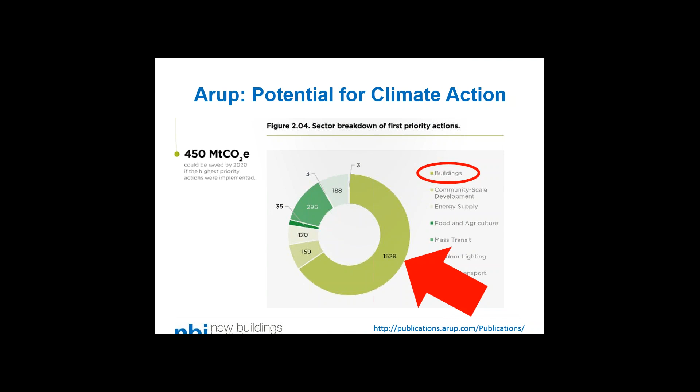And I think at the same time, it's worth pointing out Arup and C40 Cities released this study called Potential for Climate Action, and in that study, they pointed out that in terms of first priority actions for reducing carbon emissions, buildings play heavily. In fact, buildings provide the best strategy for first priority actions for greenhouse gas emission reductions. And so we would like to focus our efforts around zero net energy buildings and really tackling this first priority action through the building sector.

For the past several years, NBI has been tracking zero net energy buildings nationally, and with our current database, we've tracked the ZNE building activities that are happening across the nation, 40 different states in the U.S. You can see also provinces in Canada, and every climate zone in the U.S. represented. And our data is showing a great growth in the number of buildings that are either verified or emerging as zero net energy buildings. Please keep in mind that these are the ones that we're aware of, but if you're aware of projects that may not be in our database, we ask that you enter them into our registry and database.

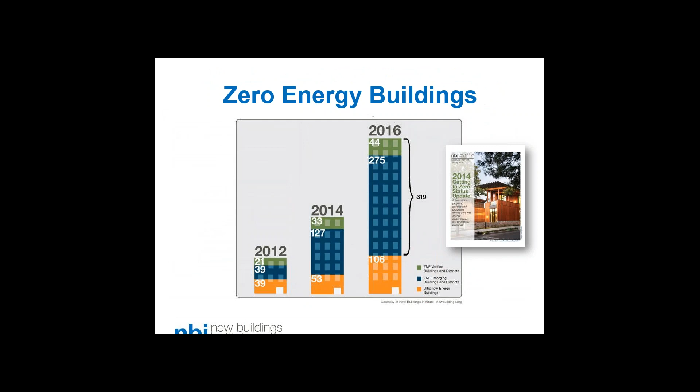Recently, we released a study that we did for the Continental Automated Buildings Association on zero net energy buildings and the controls in those buildings. This was a survey of 23 buildings that are either ultra low energy or zero net energy, to understand the way controls are working and if they're effective and what some of the challenges and opportunities are. I think one of the key findings in there that I wanted to share is this idea of setting the target for zero net energy, which is actually a big part of what our panel will be discussing today: targeting zero net energy and what strategies you can use to get there.

And I think the statistics here are really pretty important to see. That of all of the survey respondents, 100% thought setting the target for zero net energy early was very important or critical to success. So 71% saying it's critical to success. So you can see here, none of the respondents said it's not important or somewhat important or even important. It is critical or very important.

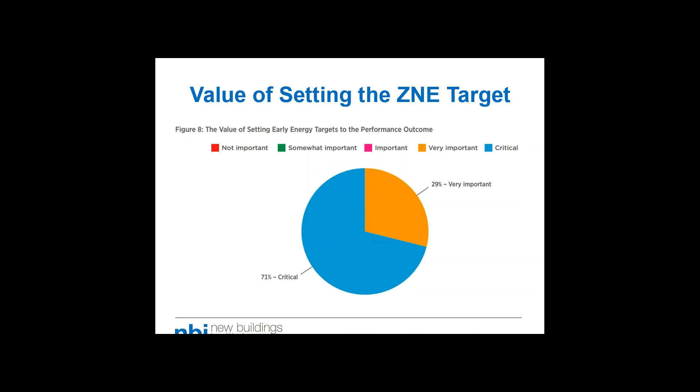In terms of our results from our survey, we find that modeled energy use intensity and metered or actual energy use intensity can vary, and also the ultimate outcome of net energy use intensity in these facilities can vary. But again, the target for ZNE was one of the critical factors in achieving success.

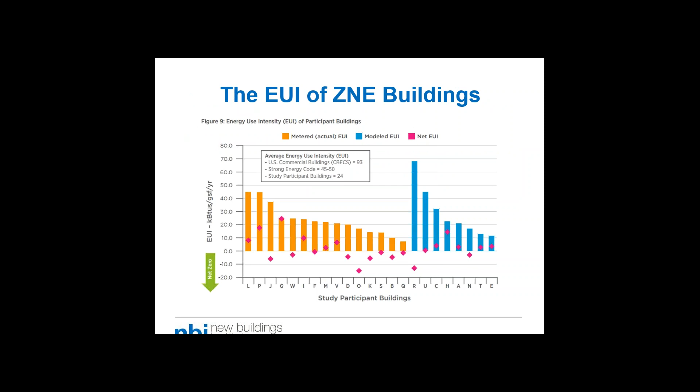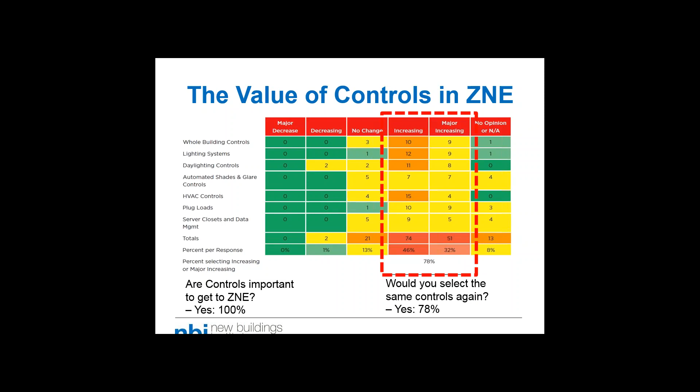We also found that controls are a key driver of achieving ZNE, and the question was basically asked, are controls important? Absolutely. And would you select the same controls again? The majority say yes, but there are lots of qualifications in that response. And we also know from our research that designing to the ZNE target and designing for performance and a focus on operations and occupancy is really important. So we're driving a lot of activity around that.

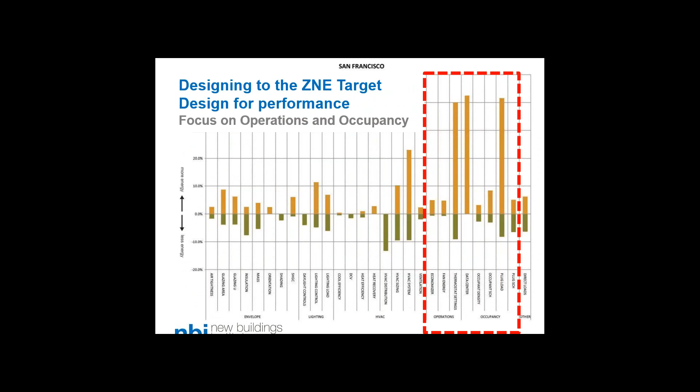And the other thing we recognize is that it's really important to integrate the people that will be operating the facility into the design process and the design team into the operating process. So we want to bring that facilities team into the design process and make sure that there's continuity with the design team through operations to close the gap that typically exists in conventional building development.

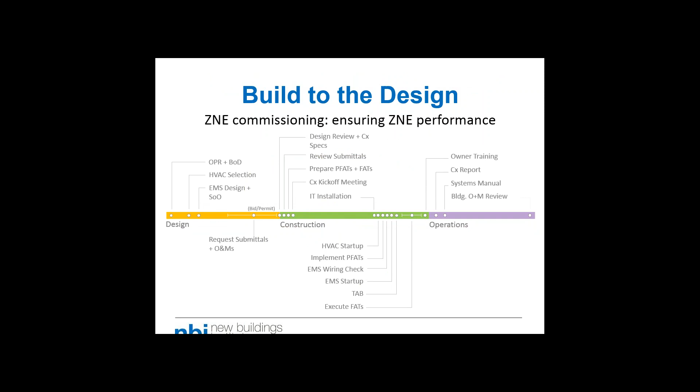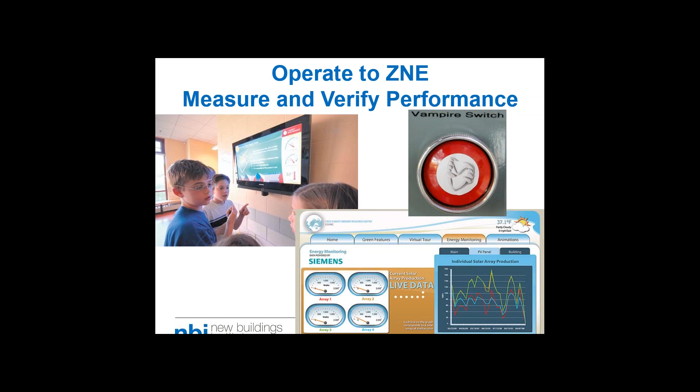And commissioning is key, and perhaps even redefining commissioning for zero net energy performance is something that could be considered as we move forward with ZNE buildings. And then, of course, basically operating to that zero net energy target and measuring and verifying performance is key, and engaging the occupants and the facilities team as well.

So just in summary, we are advocating for setting that zero net energy target early, designing to that target, building to that design, and operating to the target, and then measure and verify performance as you go, and knowing that zero net energy is not a destination but really an ongoing journey.

So with that, I would like to move to our next speaker on the panel, Charles Eley. Charles is an architect and mechanical engineer with more than 35 years experience in energy efficient and sustainable design. He's made a significant contribution to the California energy standards, ASHRAE 90.1, and energy codes in Hong Kong, Hawaii, Guam, American Samoa, and Australia. In addition to his energy code and policy work, Mr. Eley has developed a number of important publications, including the Advanced Lighting Guidelines, Lighting Fundamentals Handbook, as well as numerous other technical manuals on energy efficiency and code compliance. So with that, Charles, please take it away.

Okay, thank you very much, Ralph, for that nice introduction. Next slide. What I'm going to do today is just present sort of a high-level feasibility analysis for ZNE in the United States. Next. Next, and hit it again, Ralph.

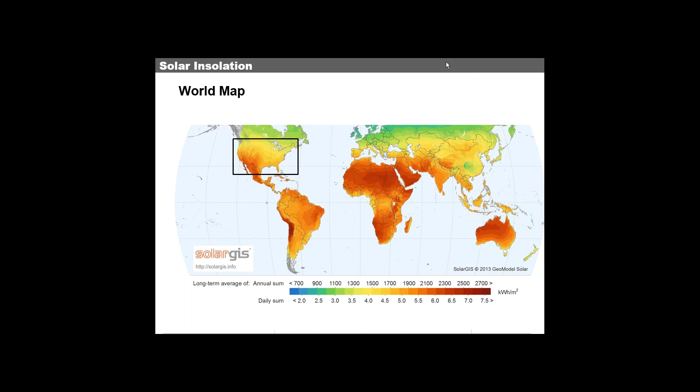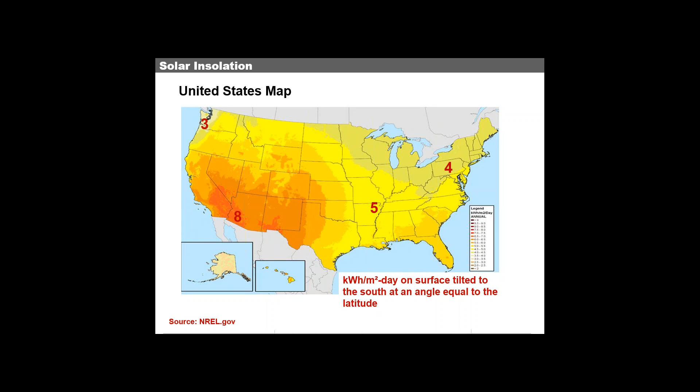So this is a map of solar insolation in the United States. Next. And what this shows is kilowatt hours per square meter per day on a surface that's tilted to the south at an angle equal to the latitude. So the Southwest has the greatest solar, the Pacific Northwest has maybe the least. Most of the country has 5 kilowatt hours per square meter a day or more. Next slide, Ralph.

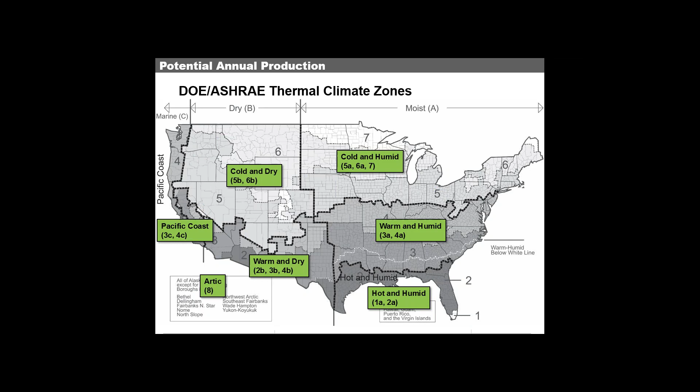So what I've done in this presentation is I've divided the DOE and ASHRAE thermal climate zones into 7 regions, which are identified here, and I'm gonna give kind of a very brief analysis of the feasibility of ZNE in each of these climate regions. Next slide. Next. Yeah, okay, there they come.

continuing to improve. And we've seen dramatic price declines in solar energy in the last 10 years, especially 5 years. Average costs are now in the range of $2 to $3 a watt. Next slide.

So what I did here is for each of these climate regions that I identified, I calculated the kilowatt hours per kilowatt at the optimum tilt. That's the first column. The second column, I calculated the kilowatt hours per year per kilowatt of capacity in a horizontal orientation. And then in the last 2 columns, I converted it to square feet of collector area. And this is based on about 65 square feet per kilowatt of collector area, which is an average for modern monocrystalline panels. Next slide, or next click.

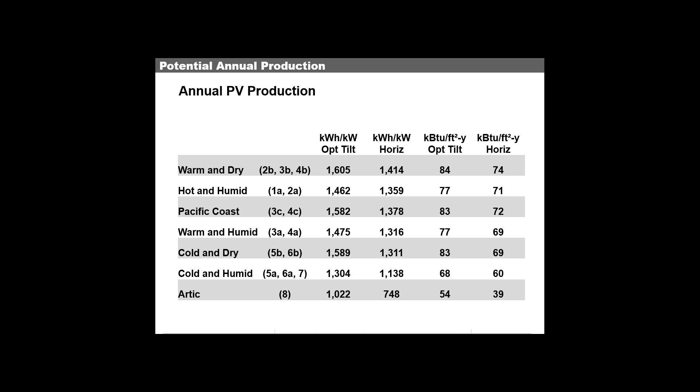So the thing is, if you want to create maximum production on your site, it's actually better to orient the panels in a horizontal position, or to slope them slightly towards the south, but in one plane, so they don't shade each other. An example of a building that did this recently is the Bullitt Center in Seattle. And for a given area, you can actually receive maximum production that way. You may have to buy a few more panels because the production is a little lower, as you can see in the first 2 columns for horizontal versus the optimum tilt. Next slide, Ralph.

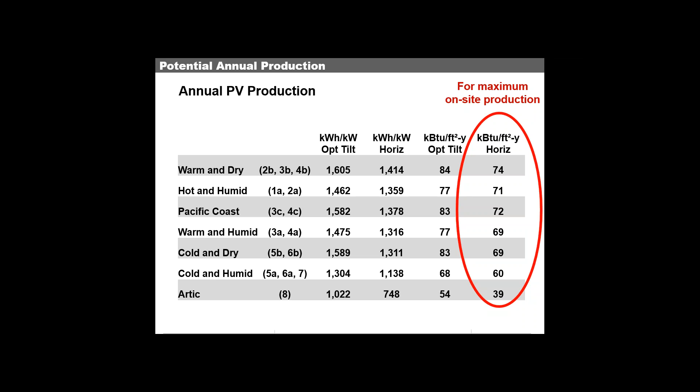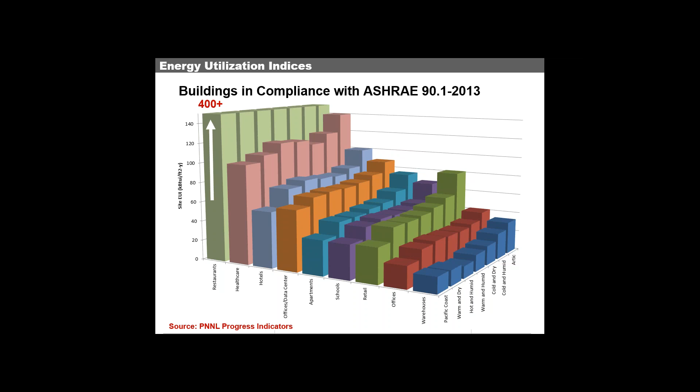The orange line are offices that have a data center in them. Then there's hotels, healthcare, and finally restaurants. The restaurants actually blow off the top of the scale up to close to 400 EUI. So these are typical EUIs for buildings that comply with ASHRAE Standard 90.1 2013, which is the latest published version of 90.1. Next slide, Ralph.

So what I'm showing here is the maximum technical potential. And this is from a study that Jason Glazer recently finished for ASHRAE. And it's based on modeling. He looked at all of the technologies that are feasible and reasonable for buildings and applied them, including some plug load issues and things like that. And you'll notice that these EUIs are significantly lower; in fact, they're on average about 50% lower than minimum compliance with 90.1 2013. Next slide.

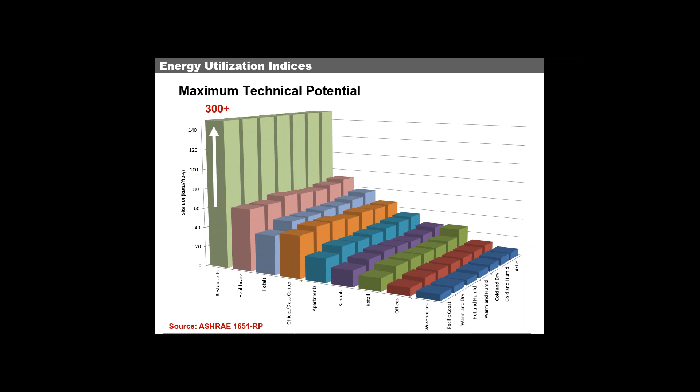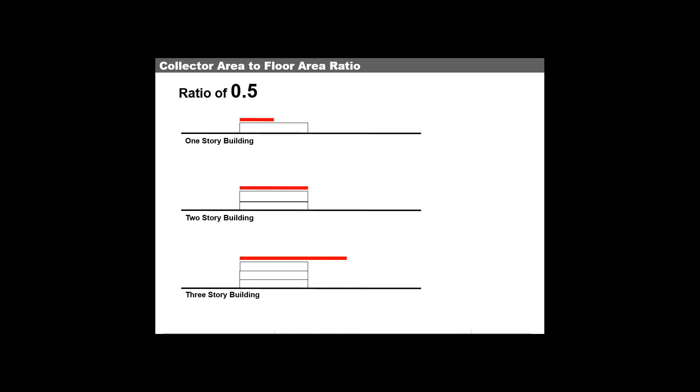So what I'm going to introduce here is the concept of collector area to floor area ratio, and show what that number is for these various situations. So if that ratio is 0.33, then you would need to cover 1/3 of the roof of a one-story building, 2/3 the roof of a two-story building, and you need to completely cover the roof of a three-story building. Next slide. If the ratio is 0.5, then you're beginning to look at problems with three-story buildings. You could get there by covering the roof of a two-story building. Next slide. And then if the ratio of collector area to floor area is 1 or more, then you're going to have some real problems in achieving ZNE for all but one-story buildings. Next slide.

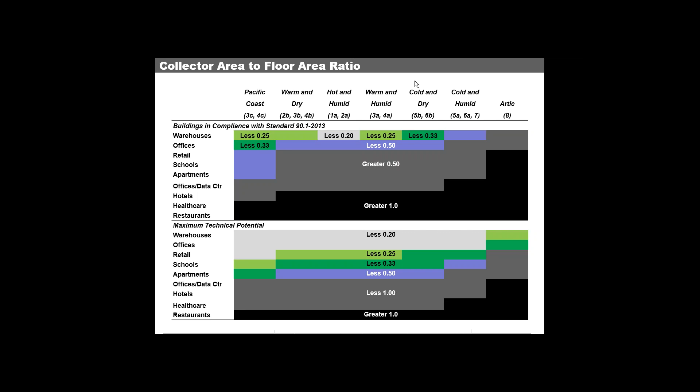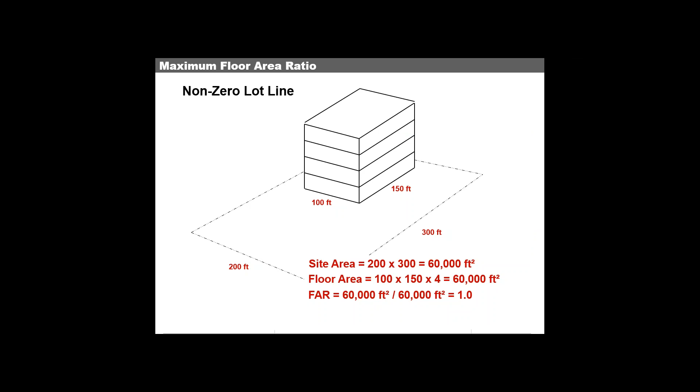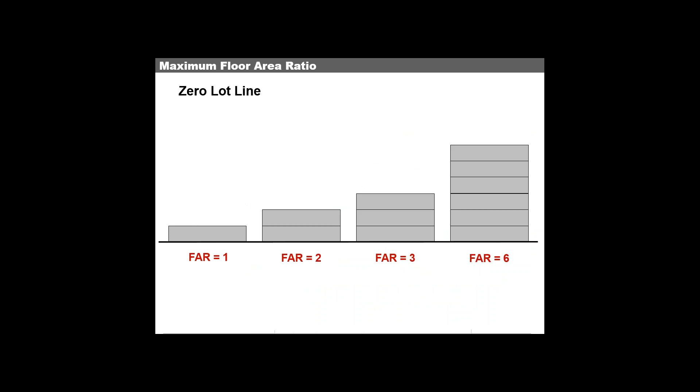So another way to look at this is the maximum floor area ratio. The floor area ratio is a planning concept where you divide the building area by the site area. So in this case, the floor area ratio is 1. Next slide. And if you have a zero lot line configuration, the floor area ratio is basically the number of floors that you have. Next slide.

So presenting the data in a slightly different format, you can see the maximum floor area ratio that you could have in order to achieve on-site ZNE. Looking again at the bottom part of this graph, restaurants are the main problem. Healthcare is also an issue in the cold and humid climate, and several building types are a problem in the Arctic. Fortunately, there's not a lot of construction in the Arctic.

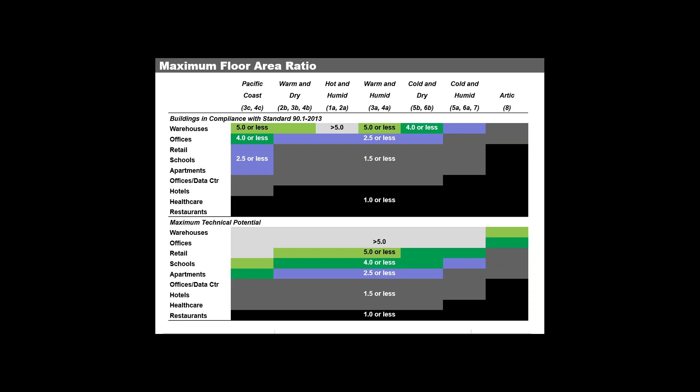And the interesting thing is that if you look at the construction area or the volume of construction activity for different climate zones and building types, the vast majority of those building types and climates are in areas where ZNE can be achieved relatively easily. Next slide, Ralph. Next slide.

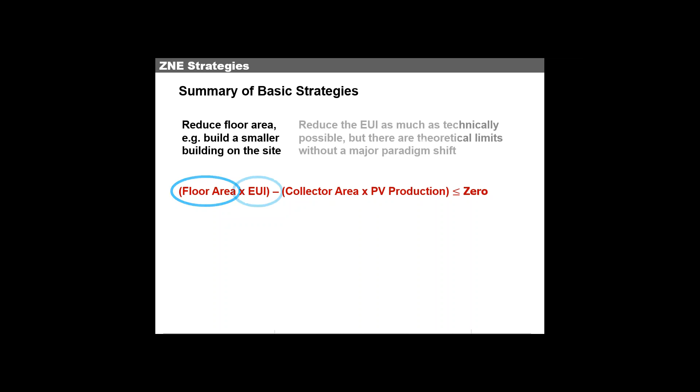So just to summarize, this is sort of the equation for ZNE. You multiply your floor area times the EUI, and you subtract the collector area times the PV production. So the first strategy would be to reduce the floor area if you can. The second option would be to design to as low an EUI as is technically possible.

There's theoretical limits to that unless we have a major paradigm shift like eliminating burgers and fries from fast food restaurants. But the next option is to increase the collector area, but this is limited by the area of the site. And the final option is to just increase PV and inverter efficiencies, but there's also theoretical limits there.

Next slide, Ralph. So there are some off-site strategies. One strategy is to combine the challenged property with other properties through virtual meters or some other technique. Next slide. Another option is to install renewable energy on a remote site. Stanford University is a good example of this. They're putting in a 73 megawatt solar farm in the desert that's going to offset about half of the electricity use on the campus. Next slide.

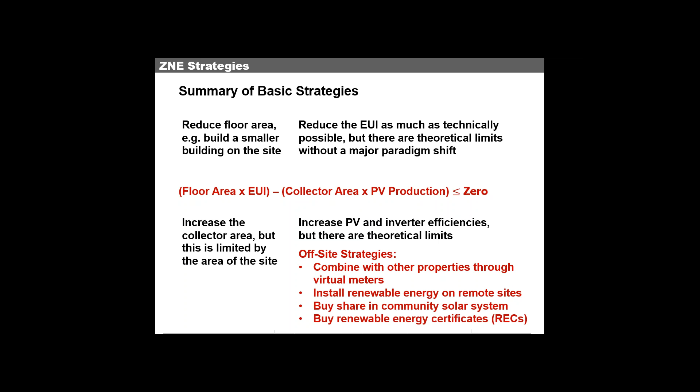In many areas, community solar systems are beginning to emerge, and one option would be to buy a share or to lease collectors in this community solar system. Next. And then the final option would be to purchase renewable energy certificates, or RECs. And in my opinion, this is the order that you should pursue for off-site options. So this is the next slide.

So that's the end of my presentation. This is kind of a top-level feasibility assessment for ZNE buildings. I think the bottom line is that it's totally feasible for all, except for restaurants, which are going to be a problem, and in some areas, healthcare and hotels are going to be a challenge, but it should be possible. And the second thing is that when it's not possible to do it on site, there are some reasonable options for achieving off-site ZNE as well.

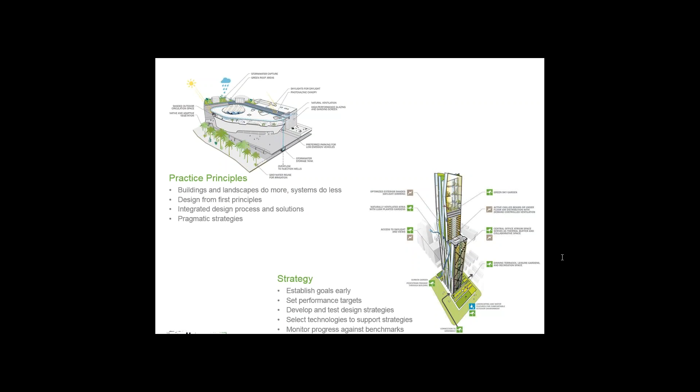Next. And so I'm going to talk a little bit about how we've successfully applied this process for net zero energy buildings through a series of three case studies that are really going to hit three different topics. One, the importance of starting early, as Ralph started us off by sharing. Having a vision for the long term.

And this is really something that we don't see very much of from our clients, and it's something that we've been educating them about, and it's really the idea that a building doesn't have to be net zero energy on day one. You can plan for it to be net zero energy over the life of the building or at some future date, but it's important to plan for that now and then implement it over the long term. And then finally, the importance of not forgetting the small stuff when you're designing a net zero energy building.

Another important thing that we have to educate our clients on is that every single thing that uses electricity or energy in your building has to be accounted for. Next.

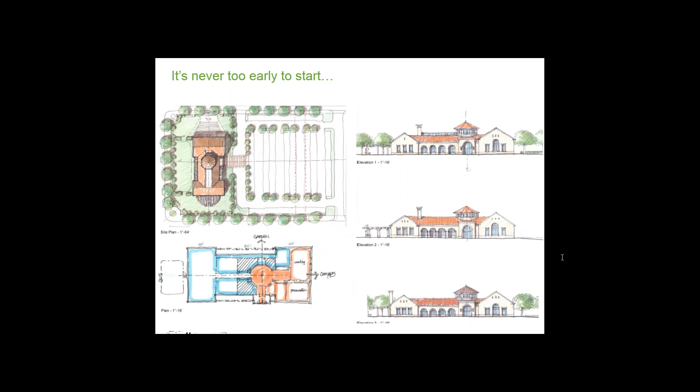So the first case study I have is a project I worked on about 8 years ago. It's a college admissions building in Texas that was being designed by Cannon Design. Next. And this project really illustrated that you can never start too early. I was asked to participate in this project, and basically this is what I was given. I was given a watercolor drawing of the vision of what the architect wanted to design for the building, and that's about it. Next.

And from that, we built a fairly robust prototype model based on the program areas that they discussed with the client, and we created an energy budget. And from that energy budget, we were able to refine it to the point where we were able to show that, with a set of assumptions, we could achieve net zero energy for the project. Next.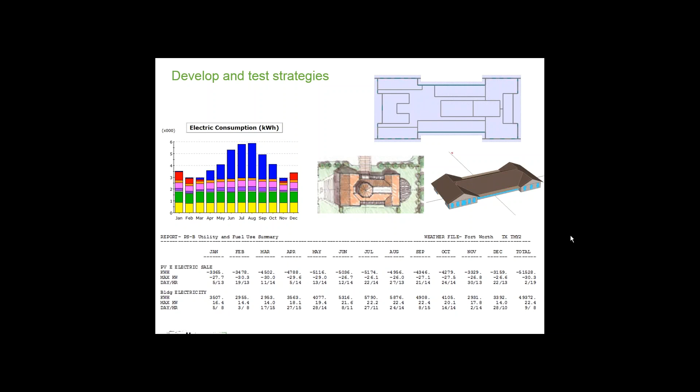And what that allowed us to do is really in pre-schematic design, we were able to set some very aggressive performance targets that the project team would have to achieve in order to get this building on a path to be able to meet net zero at the end of design. And I think the highlights would be that instead of talking about plug load energy and lighting energy, which we typically describe as a density, a watts per square foot number, in this case, it's important to talk about these types of energy uses as consumption targets. So how many kilowatt hours a year per square foot are you allowed to consume?

And this changes the conversation a little bit, because now, taking lighting for example, it's about not only designing the light fixtures themselves to use less energy, but it's also about the controls that are controlling that lighting and how it delivers an integrated system that's going to minimize energy use throughout the entire year. Next.

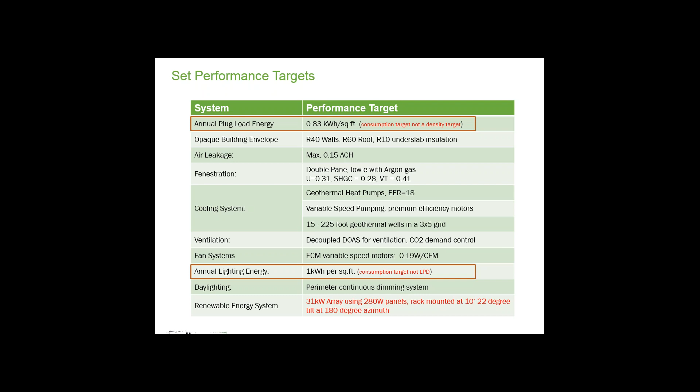Okay. My second case study is a little more recent. This is a GSA federal building that was designed by Crook and Sexton. And the interesting story about this project was, as I mentioned, having this vision for the long term. Next.

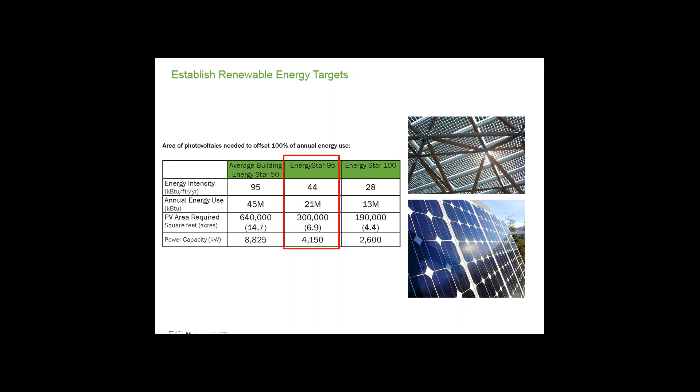And the project chose to target an ENERGY STAR 95 score. So it didn't target the most aggressive building energy performance that it could. And really this was striking a balance between first cost and performance and the magnitude of the renewable energy systems that would be required to hit net zero energy. And so that's why it's important to sort of bookend, and then you can do this optimization analysis to find the right target. Next. And then with that target, the team was able to go and design a building that met that performance. Next.

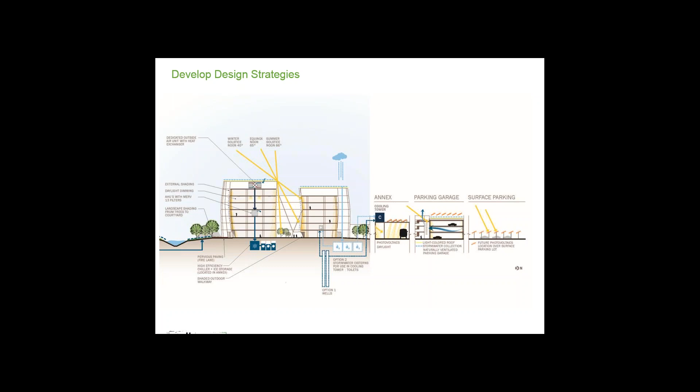But really the most interesting aspect of this project wasn't that it was designed to be net zero energy. It was that it's designed to be net zero energy at some time in the future. The project couldn't afford to be net zero energy on day one. And so on day one, the building was designed to only have about 17% of the PV it needed. It had about 30% of the solar hot water that it needed to get to net zero energy.

But there was a plan that was created to allow the building to expand the renewable energy on the site to achieve the net zero energy goal over a 10-year period. And as you can see, it was a phased approach that adds PV to additional roof and parking, and then continually adds PV until at the end of 10 years they would be achieving net zero energy.

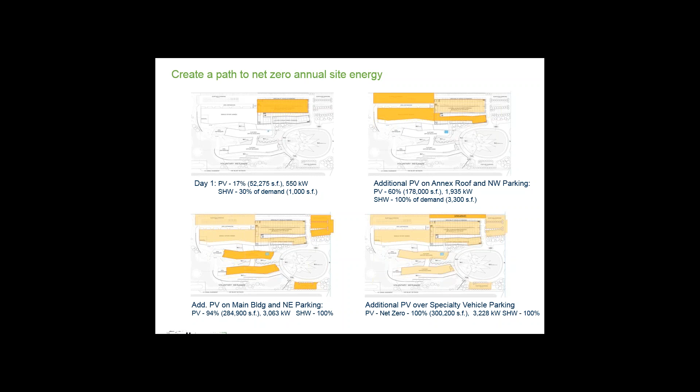Too often we come up against clients that think about it as an all or none. You know, oh, I have to do net zero energy all in or not at all. And my message would be, it doesn't have to be. Phase it in over a period of time and at least design the building and the site so that you can achieve net zero energy in the future. Next.

And then finally, my third case study is a project, Frick Park Environmental Center in Pittsburgh, that was designed by Bohlin Cywinski Jackson. And this is really about not forgetting the small stuff. Next. And so Frick Park is pursuing Living Building Challenge. For those of you that don't know, Living Building Challenge certification is sort of like LEED on steroids. And one of the things that you're required to do is to be a net zero energy building.

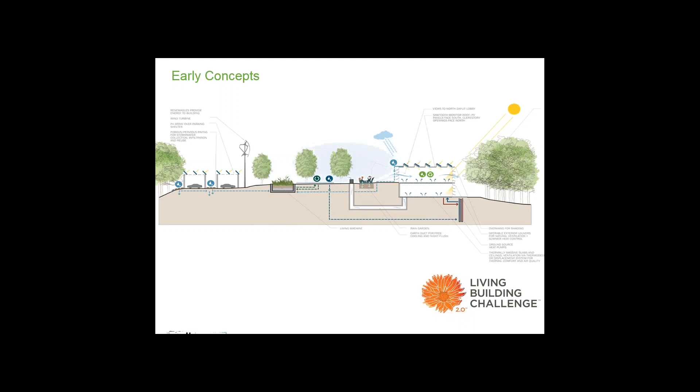And so the project started with early design concepts. Next. Then it moved into the more detailed design phase. And really what happened at this point is the client started to introduce all the other things that they needed for the site. They have gatehouses that are the entrance to this park site. They had a barn and service yard. They wanted to incorporate a fountain as part of the landscaping design. And all these things needed to be incorporated into the accounting of net zero energy as part of the Living Building Challenge certification. Next.

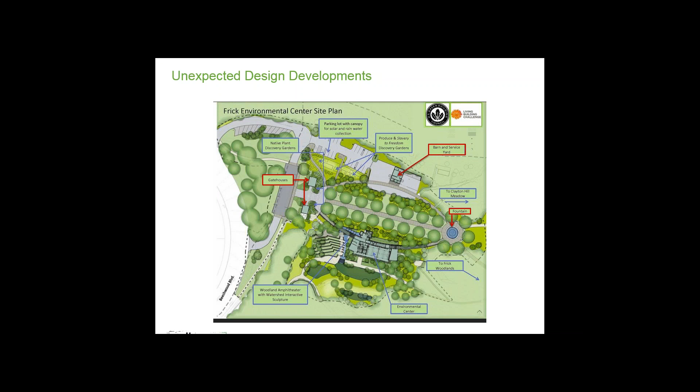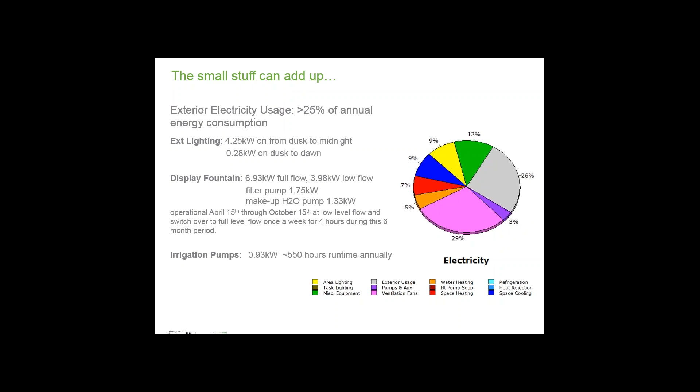And as you can see for this particular site, the exterior energy use was about 25% of the total annual energy use. And if it had been forgotten, the project wouldn't have been able to achieve the Living Building Challenge. And so it's really critical that you carefully account for all of the different pieces of equipment that are on the site, even things you don't typically associate with the building, like outbuildings or landscape features that are going to use energy as well. Next.

And so I would say, again, from that process standpoint, it's never too early to start. It's critical that you design energy metrics for both the design and the operation of the building. Don't be constrained by designing for day one. If your budget can't afford it, plan for the future. Plan to achieve net zero energy at some point 5, 10, 15 years after the building opens.

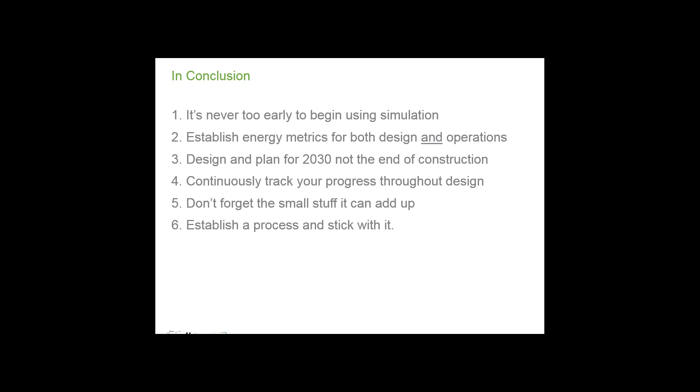You have to continuously track your progress throughout design to make sure that you're on task and that changes haven't popped up that impact your budget. Don't forget the small stuff, and you have to establish a process and stick with it. Those are really the drivers for successful net zero energy buildings. Next.

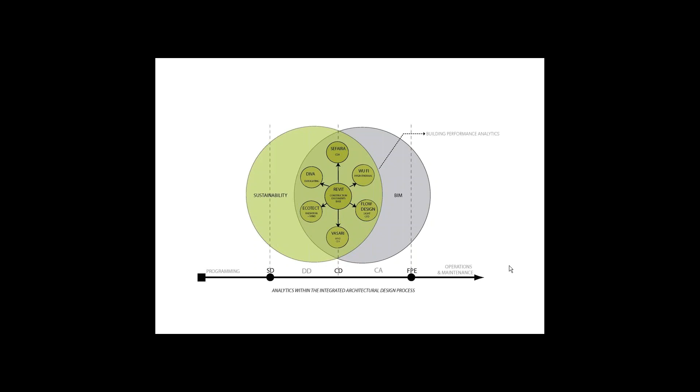And teaching our young architects to embody this idea starts from the BIM sustainability wheel, which explains how building performance analytics is integral to driving the design process all the way to the operations and maintenance phase, similar to what Mike had alluded to. We're teaching students not to stop at the occupancy, but to continue, and we're teaching them tools that can go from the onset of design into facility information modeling using BIM tools.

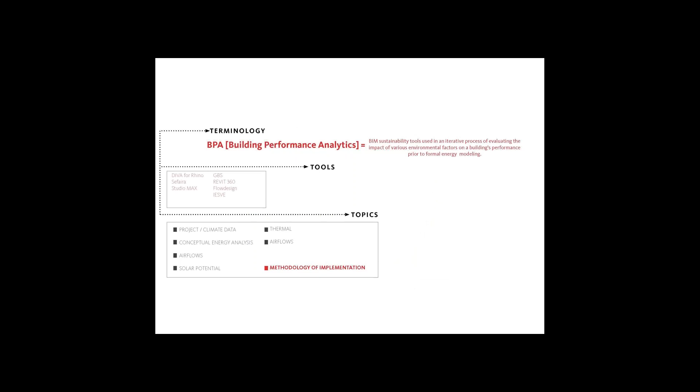So with respect to building performance analytics, we can define BPA basically as a series of tools used by architects in the process of evaluating performance prior to energy modeling. The tools are associated with topics of environmental conditions which require understanding. And as you can see, there are many different topics.

Various software can attain certain performance analyses, and environmental factors are applied to passive strategies, but namely those that impact energy. There are 4 main categories that I've identified with respect to optimizing passive strategies prior to mechanical intervention in sustainable design and net zero design. These are solar potential, which is daylighting, solar radiation, shading, electric lighting. Climate, CEA, conceptual energy analysis, airflows, whole building simulation, and thermal qualities.

Through the past few years of teaching building performance analytics as a new course, I've recognized certain patterns in how students are using these tools to create their designs, the studio projects and projects within the building performance analytics class. I've collected these methodologies and deemed them methodologies of BPA integration.

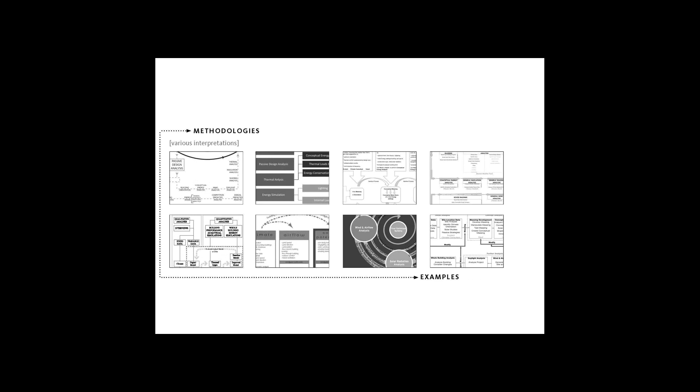Through studying many of these, both in the classroom and outside, prior to my entry into full-time academia when I was practicing, I recognized that certain factors need to be grouped together to maximize ease and fluency in maximizing potential optimization of some of these early sustainability objectives.

Solar potential is one of the most important, and it spans 4 different categories: shading, solar incident radiation, daylighting, electric lighting. Project climate data is more of the static element that really can't be changed so much when you're doing performance analytics. Conceptual energy analysis, CEA, is one that studies EUI at the onset of a project very preliminarily and then starts to increase the specificity as the model is informed with context, with materials. Thermal and airflows also are in tandem with the conceptual energy analysis studies.

The various interpretations of how these tools should integrate into the design process have been explored and are continuing to be explored, but a few conclusions can be documented as static and dynamic iterations of integrating tools to define an iterative analysis. This is the climate tool. Climate Consultant is the nominal and the most outlasting tool that's been used to study climate, radiation, precipitation and wind flow, wind direction, and this is probably the most commonly used building performance analytic. This would be a static iteration.

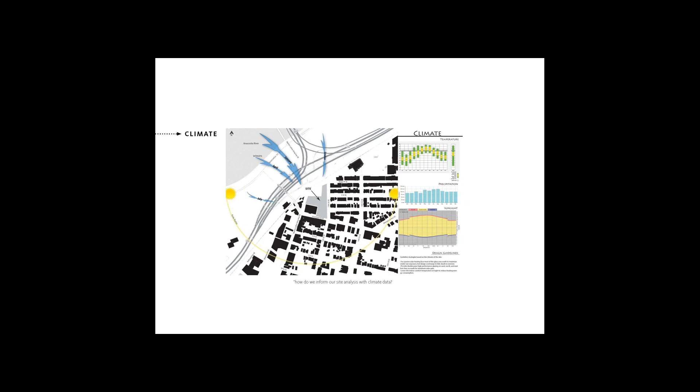Since the climate and the climate files are the only elements that aren't going to change in the analysis. These static iterations are climate data, which can be retrieved from TMY files, but not typically modified so much during the analysis unless, of course, your site changes. The dynamic iterations really occur as certain analyses are clustered into these logical pairings. For example, conceptual energy analysis.

So the next few slides, probably 7 or 8 slides, will demonstrate the application of the integration of these tools in that methodology of clustering analytics. Conceptual energy analysis, which many of you are familiar with, can be accomplished through a variety of tools nowadays.

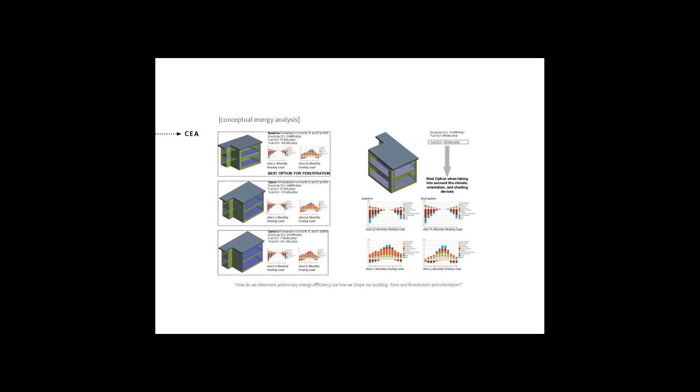In this example, we're taking a standard building and we're trying to identify the maximum orientation, the most potential optimization for orientation, and then we're also exploring fenestration percentages with that. And at the same time, we're beginning to identify what sort of shading devices would be used. So how do we determine preliminary energy efficiency via how we shape our building? I like to call this form, fenestration, and orientation as the first step of conceptual energy analysis.

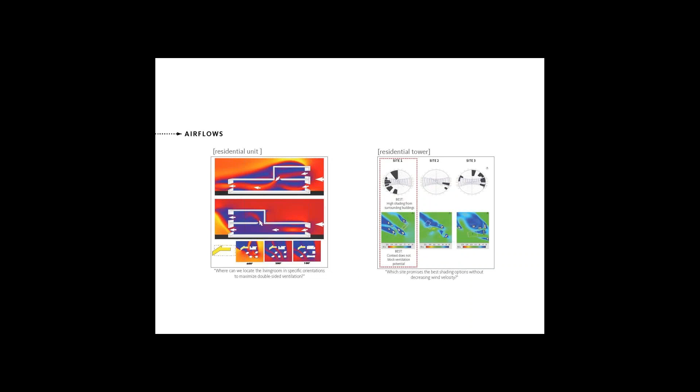In the second step of the dynamic studies, the airflows are optimized. This includes identifying natural ventilation potential, blocking unfavorable wind potential, particularly in the winter in different climates, and also studying contextual impacts of wind. Where can we locate the living room, for example, in this unit to the left, to maximize double-sided ventilation? And on the example on the right, in the residential tower design, which site promises the best shading options without decreasing wind velocity?

The next dynamic study is the hygrothermal study. And in the example that I'm showing you, we're using the tools of WUFI and Therm to identify dew point, and we're also identifying the rate at which infiltration may or may not occur. These two combined together will show us where the ratio of water vapor to air may be at risk of reaching 100% RH condensation at a certain point, which is right here.

This is a SIP panel that we're analyzing in a California climate. So in this Therm example, by keeping the dew point line farther from the interior wood stud, which this is the interior, moisture and mold are potentially reduced.

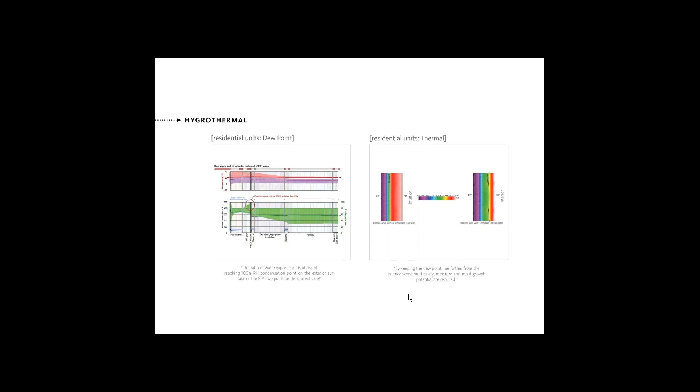After studying the hygrothermal, we take a look at the solar potential synergy, is what I like to call it, where we study simultaneously shading, solar incident radiation, daylighting, and electricity, because they're so symbiotic. I've got a few slides on this.

The left-hand slide shows an airplane hangar about 1,300 feet long, pretty long, but very narrow. The contractor was asking how many skylights would be needed to meet LEED for this facility. At first, I wasn't sure, ran a quick study in 3ds Max, and recognized that there were absolutely no skylights needed to achieve the LEED requirements. This was a LEED project between 25 and 500 foot candles without any skylights whatsoever, and that was a quick 3ds Max study.

On the right side, we had a client that was studying whether or not it would be cost efficient to employ a sophisticated sun shading screen. We took this study into Ecotect, which is now obsolete. It's no longer downloadable. But at the time, a year and a half ago, we recognized that the more complex shading structure that you could see in the middle actually yielded very similar shading to the shading structure that only had minimal shading. So that was a cost-saving potential for the client.

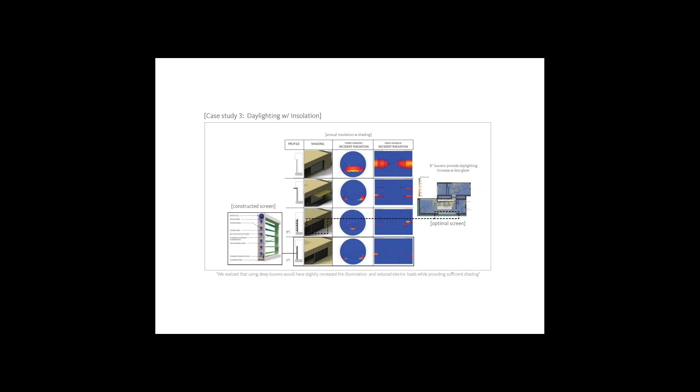But what was interesting is when we took it to a daylight study, we recognized that due to the bounce of the sun on the depth of the louver, we were actually able to slightly decrease the electric lighting inside of the small kitchen space, because the amount of light that bounced from the longer louver provided a little bit more daylighting. It was just a couple of foot candles, but in a small space, a couple of foot candles really means a lot. So with this study, we were able to synergize all 4 different aspects of the solar potential to come up with a conclusion that we didn't end up building, but we ended up discussing at the very end as something we should have looked at much earlier in the design process.

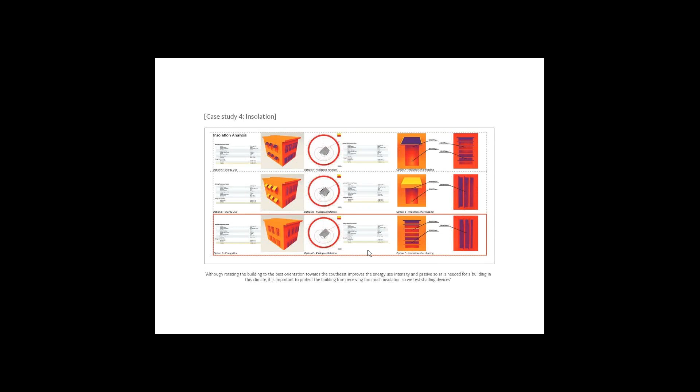This is an insolation study where this was a student project, and the student was asked to analyze the same shape, size building for the maximum orientation and shading mechanism of a certain climate using different types of studies, different types of shading devices that were modeled and then tested. Taking that final conclusion, the best solution, which was option C, which yielded the highest energy efficiency, the best EUI, to a second study, which was the energy modeling phase.

Artificial lighting with daylighting is also very important and a part of that lighting synergy that I discussed earlier. This takes a little bit more time, especially if you're designing the lighting independently of the daylighting study. That means the two different analyses need to be run simultaneously.

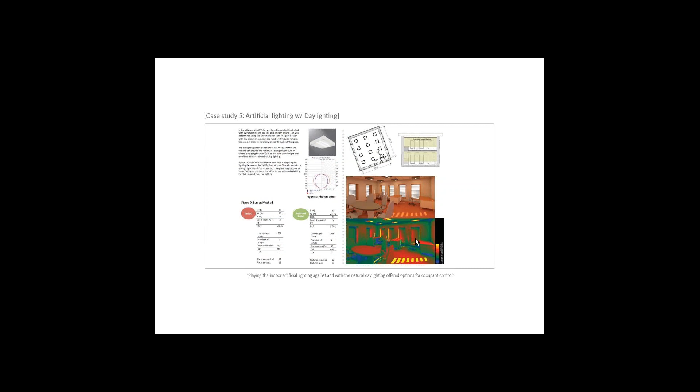integrating building performance analytics tools into the design process definitely has challenges and benefits. The challenges are training. A lot of people need a little bit of time to train on some of these tools to understand what the analytics are really describing in their project. Some of that time may not be afforded in practice. Some of it's not even afforded in one semester in school, even in studio class.

Some of the challenges also include product selection. Various manufacturers are constantly evolving their tools. From the presentation that I presented last year, I had to change many of my slides because the tools simply were obsolete. Ecotect, a favorite of mine especially in incident radiation, is now not downloadable anymore. So other manufacturers are adopting that software into their mainstream and constantly evolving that software.

Interoperability also is a challenge. Interoperability into the design process of your firm or institution, or with other building performance analytics software. What's the basis? Some of it has more of a Revit basis, some of it is more based on a Rhino model, building information model.

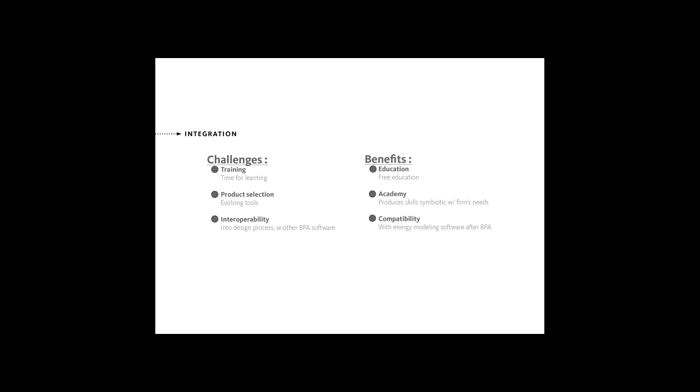And also compatibility with energy modeling software. The tools after the BPA software are the energy model. So we have to make sure, and most of them are compatible with the official energy modeling software. So

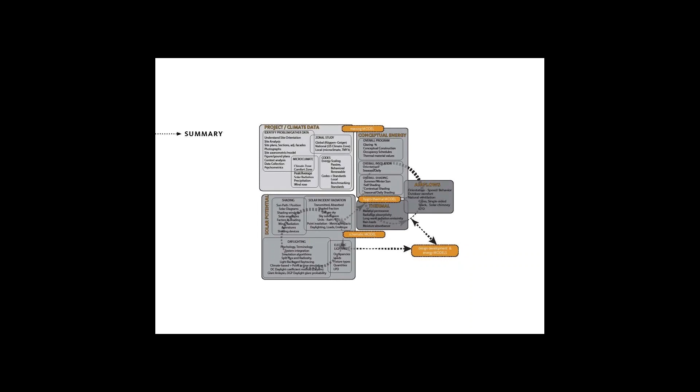in summary, this is the synergy that I have created based on a couple of years of research of the best synergies of building performance analytics. You can find more information about this in JNIBS's article last summer, where this methodology was published.

I want to also mention at CUA we are now exploring how to democratize high performance design by embarking on projects where we implement this methodology to design housing for some of the marginalized populations, specifically a recent grant to design transitional refugee housing. So we're not just saving this for the high-profile clients, we're also using this for some of the clients that may be a little bit more marginalized, but still are ever in need of net zero design and high-performance strategies. Thank you.

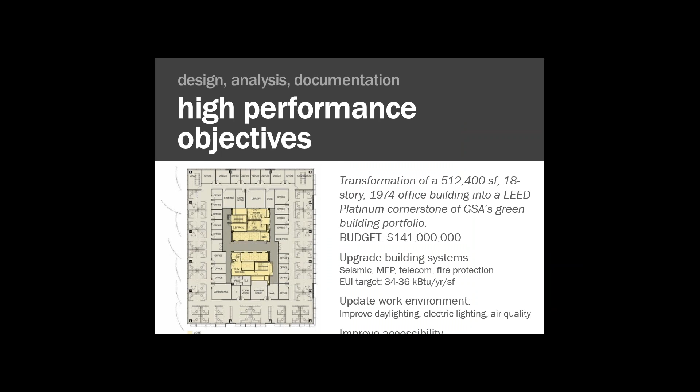One of the things that I'm just going to focus on specifically is the importance for net zero buildings and any building that has very aggressive energy goals of really integrating the approach to the building enclosure, in this case the facades, with the HVAC. So that was a very rigorous process in the design phase of this building with multiple team members.

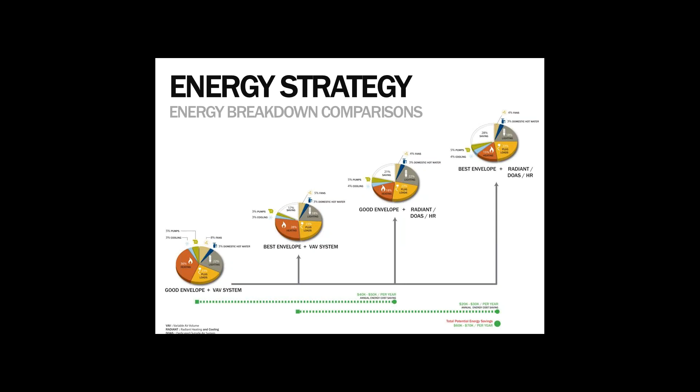The next slide, please. So the team looked at a whole series of strategies, combinations of measures that yielded various results, and you can see from the left there with a good envelope and a VAV system, and then improving it. But ultimately, it was realized that to achieve the levels of performance we were looking for, we needed both the best envelope that was reasonable for the building, as well as basically the best system, which is to say a radiant system where we would decouple the ventilation needs of the building from the heating and cooling side. Next slide, please.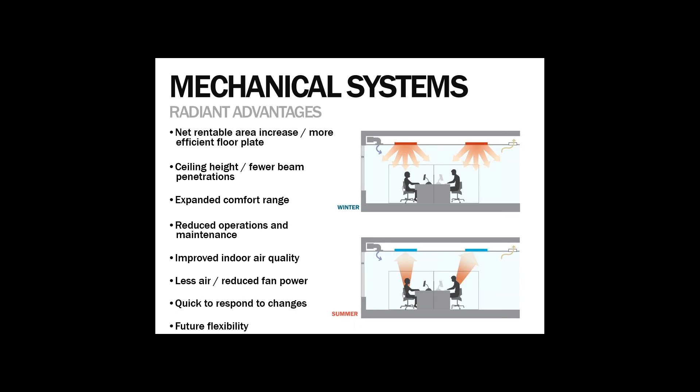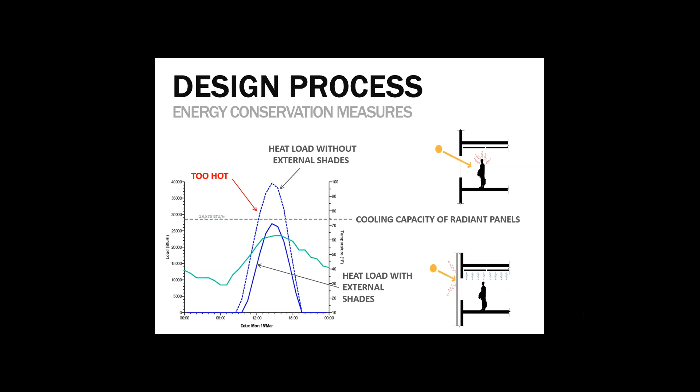But one of the things that was really critical with going to a radiant system and separating off the ventilation air as a dedicated outdoor air system is that there's a limited capacity with this type of radiant panel system to remove heat from the space. And so it was understood from fairly early in this process, working with the team, that the heat load on the building needed to be reduced. And if it could be reduced to the level that was within the capacity of the radiant panels, then the project could succeed. If not, then it wouldn't work. So basically there was sort of a budget that was established for how much shading needed to be provided to the building. Next slide, please.

So the process of design and analysis involved both digital models and physical models to really understand multiple aspects of balancing the solar heat gain with the daylighting intentions too, trying to get as much daylight as possible, both for the multiple benefits for the occupants with their health and well-being, as well as reducing the energy by offsetting electric lighting through integration with the control system. The next slide, please.

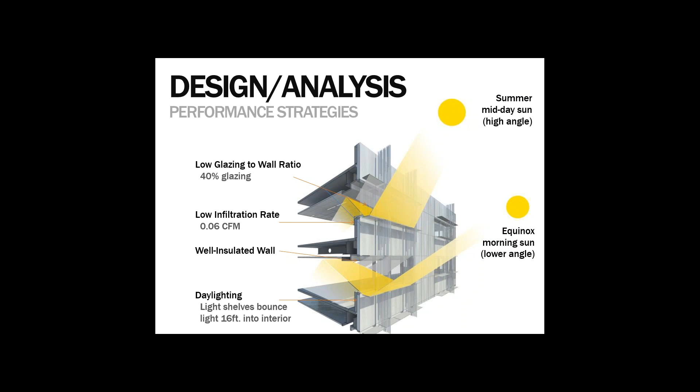And in the end, it was realized, not surprisingly, that specific strategies needed to be employed for the various solar orientations of the building. The grid in that part of the city is shifted by about 15 degrees, and so it's not exactly true north-south. But basically, there was a strategy that was found to be effective on both the south and the east elevations, and then a separate strategy for the west elevation, and then the north elevation received a small enough amount of direct gain that no additional treatment was deemed necessary. The next slide, please.

So on the west, basically there is a series of vertical reeds, and for anyone that's followed this project, there was a period when there was a desire to actually do a living wall and to see if the shading from that living wall could actually provide the solar management for that side, which is a really compelling strategy, but unfortunately it involves a lot of risks if you're actually depending on that. So instead of that, a series of aluminum reeds, as we refer to them, were designed for that face of the building, with some plants growing up it, but not depending on them and their growth over time to actually design the system. Next slide, please.

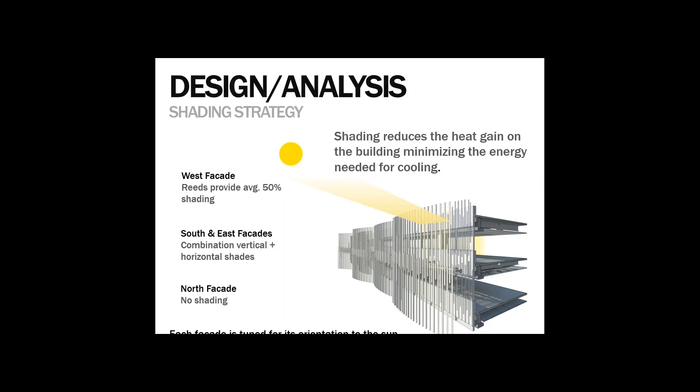And then there is a sloped roof plane above the building that does incorporate solar PV. Now, of course, with a building of this scale, we weren't trying to actually achieve net zero, but it was a way of both engaging with the solar potential of that site as well as rainwater collection. So there is a harvesting system where the water is collected from the rooftop, and a former firing range in the basement was repurposed as a cistern, so that was waterproofed and used to hold rainwater.

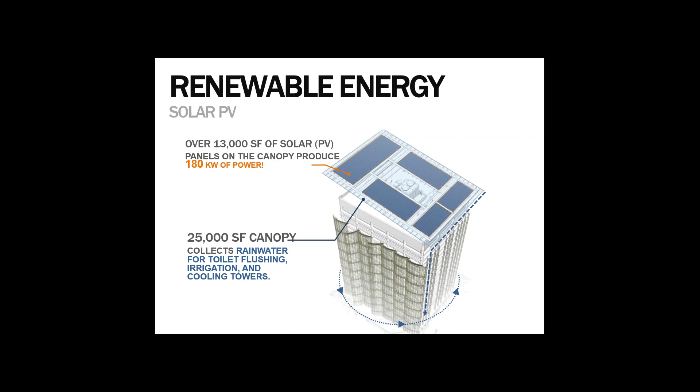Next slide, please. But what I wanted to focus on today primarily is the results from the occupant satisfaction survey. Next slide. We actually ran a number of surveys. We had the opportunity to survey the occupants prior. So while this building was undergoing construction, the federal employees were moved out primarily into two locations in downtown Portland, one just a block away and the other about 5 or 6 blocks.

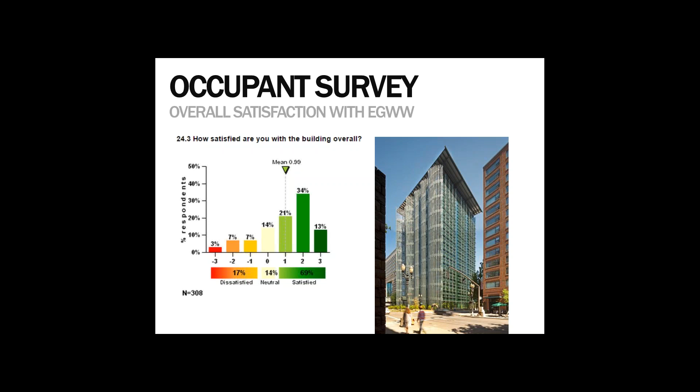The thing that was interesting is that we found that those areas that we were most concerned about were the most successful. And in fact, we had a higher level of thermal dissatisfaction on the north face of the building and on the lower portion of the east. And so this is actually valuable feedback to look more closely at what's happening there and to work with the commissioning team and building operator to see how that can be adjusted. I think it's a matter of some enclosed office spaces and just the commissioning of the systems in those locations. The next slide, please.

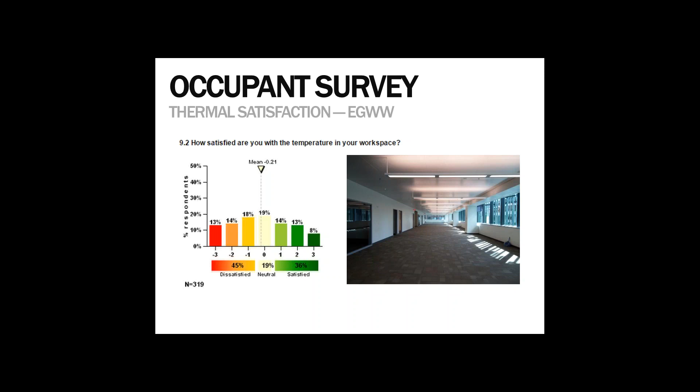Overall, we find that the occupants actually are a little too warm. Especially when compared to the other building with the newer variable air volume system, VAV, which is more of a conventional delivery of a large volume of cooled air. That building actually had very high levels of discomfort during the summer months from people being too cold. So despite how much publicity that problem has, we still see, even in LEED Platinum buildings, energy being wasted to make people uncomfortable, which is obviously ironic and unfortunate.

A great opportunity, though, to make improvements. We did not have that problem in this building. In fact, we had the opposite problem. We had people being a little uncomfortable from being too warm.

And so it was interesting to look at their reasons for being too warm. Part of it had to do with less air volume moving. People were less used to that and a little bit less comfortable. And also, I think there are some ways in which this can be improved. The next slide, please.

So just to sort of summarize a little bit the results. So the post-occupancy surveys are really a valuable tool for a number of reasons. First of all, they provide great feedback for commissioning and for further adjustment and fine-tuning the operations in the building. There are cases where sometimes actually energy is being wasted, making people uncomfortable, or even trying to figure out the right balance. In this case, the ventilation air is being warmed a little more and maybe is even a little overwarmed, given the results we're seeing back. But there's a great opportunity to improve that.

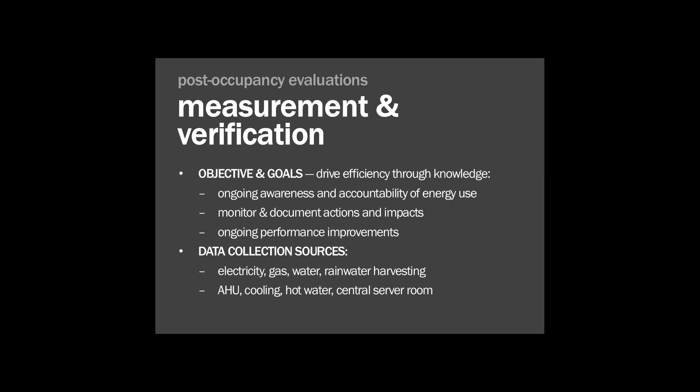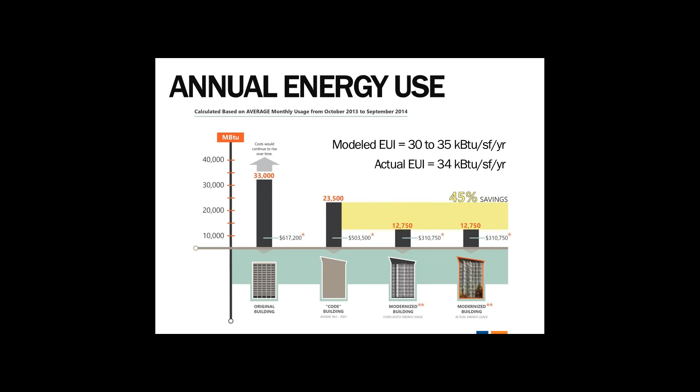In terms of the overall energy use of the building, could we have the next slide, please? The goal during the design phase was to hit an EUI between 30 to 35, and we've tracked it. So this slide shows the usage of the original building, of a code baseline building, and then the modernized building, both modeled and the actual as measured over a 2-year period. It was projected to be about a 45% savings, and indeed it is achieving very, very close to that. Next slide, please.

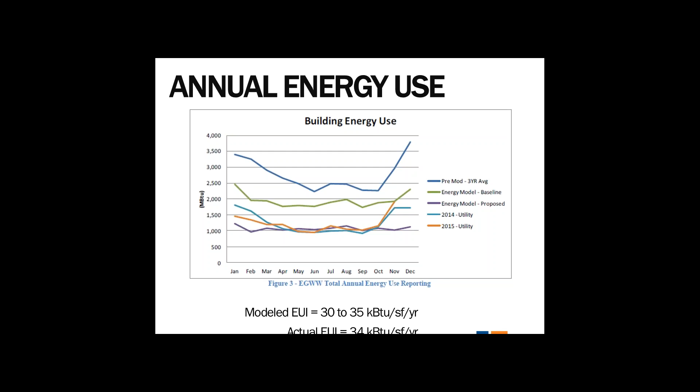And this actually is a graph that shows the actual use. So from the last year, you see the orange line. The building is operating at an EUI of 34, I believe it's 34.2, which is a great performance. We're very happy to see that. When we look into the results again, we realize that the natural gas use is actually quite a bit higher than expected, and other uses sort of are offsetting that. So again, I think there's an opportunity to go in and look at the dedicated outdoor air system, how that air is being heated and probably overheated a bit. The next slide, please.

So just sort of looking at these strategies and what we can learn from them for approaching net zero buildings. Next slide. The primary strategy that I've been talking about today is the integrated facade and HVAC systems. Obviously, there's a lot more to it than that, as we've heard from the other presenters today and from Ralph. In this case, there are some big challenges, especially if you're really looking for net zero. With an existing building, of course, the floor-to-floor heights are fixed, and your floor plate is fixed, and it's in this case a rather deep floor plate, which limits the access to the outdoors.

Natural ventilation is a very effective strategy, especially in the Pacific Northwest, and it would be great to see a building such as this be naturally ventilated. But there's also the balance with program, and in this case, there are GSA security requirements which make natural ventilation very, very difficult, in most cases really impossible. And then, of course, the PV potential, as we've seen in Charles and some of the other presentations: when you have a tall vertical building like this, 18 floors, there's just not enough roof area to actually offset the building itself. But it still can make a positive overall contribution in reducing the energy use.

Looking at the occupant results, with the net zero strategies, because we're really trying to dial in the energy use, the comfort becomes a big issue. If we ignored occupant comfort, it would be much easier to achieve net zero, but obviously that doesn't make sense. We're making buildings for people. It is certainly very valuable to get the buy-in of occupants. The more the group of occupants is engaged with the approach, the more they're willing to use their own activities and dress to work in conjunction with the building operations to meet those goals.